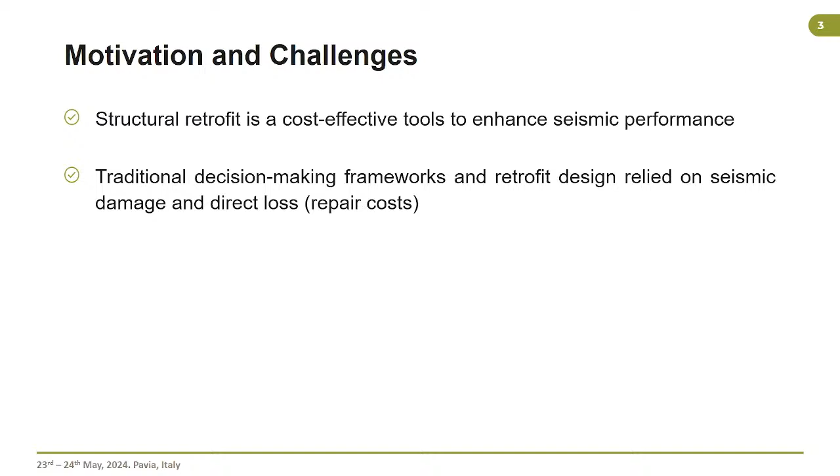I'd like to begin with the reasons that motivated my research. We all acknowledge that structural retrofitting is a very cost-effective tool to enhance seismic performance. The problem is that traditional decision-making frameworks for retrofitting typically rely on seismic damage and the corresponding direct losses, or repair costs. However, other crucial metrics like sustainability and indirect losses due to downtime are typically overlooked, because of the lack of suitable models to characterize them.

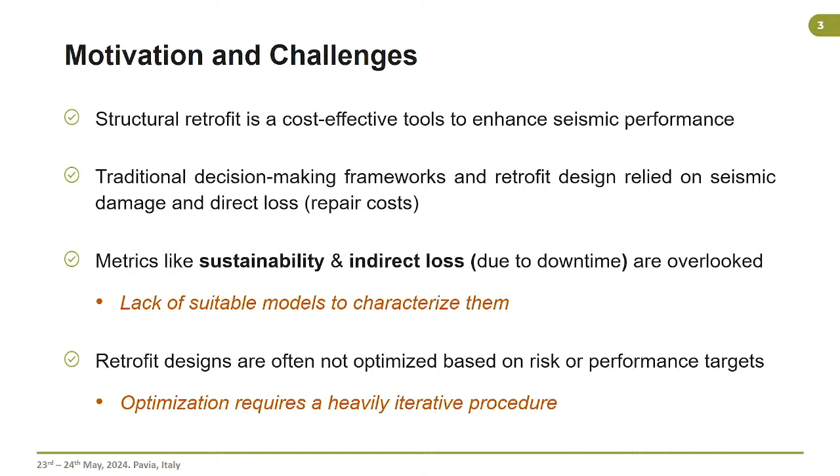Another issue is that retrofitting designs are typically not optimized based on performance or risk targets, again because this process can be heavy in terms of computational effort. So I divided my presentation into 4 parts accordingly, each tackling a particular challenge from what I mentioned before.

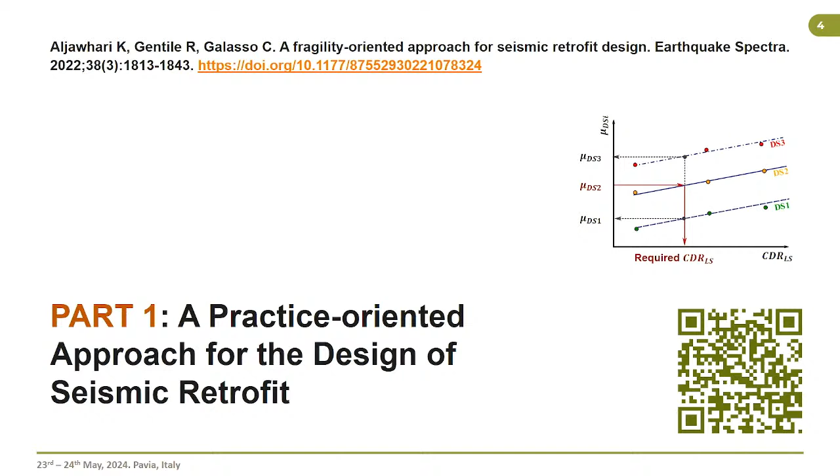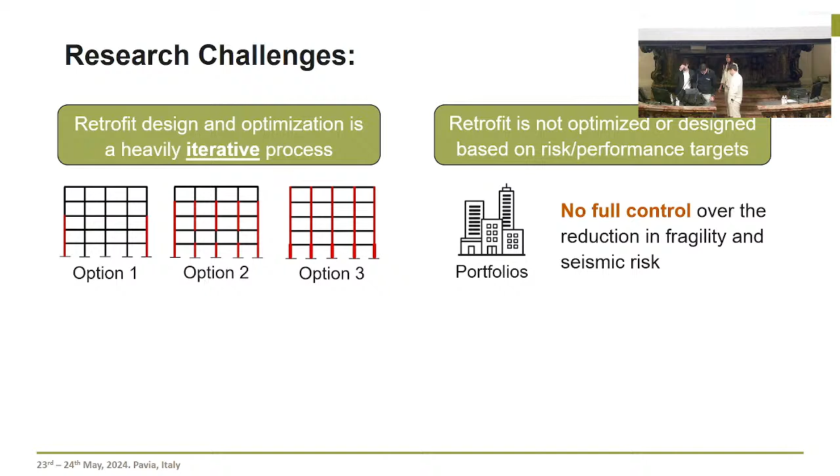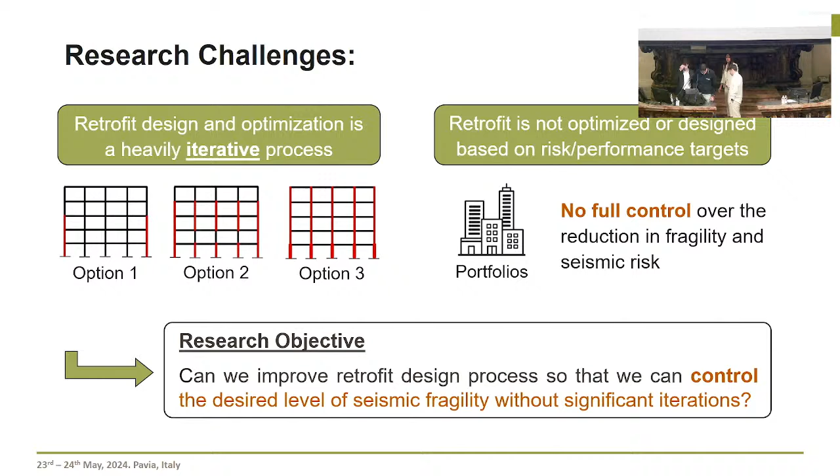Part 1 is about a practice-oriented approach for the design of seismic retrofitting. I remind you that retrofitting design and optimization could be heavy in terms of iterations, and this becomes even more complex when looking at building portfolios, because without optimization I don't have full control over the reduction in fragility and seismic risk. So the question is: can I improve the retrofitting design process to control the desired level of fragility without significant iterations? That's what we'll find out.

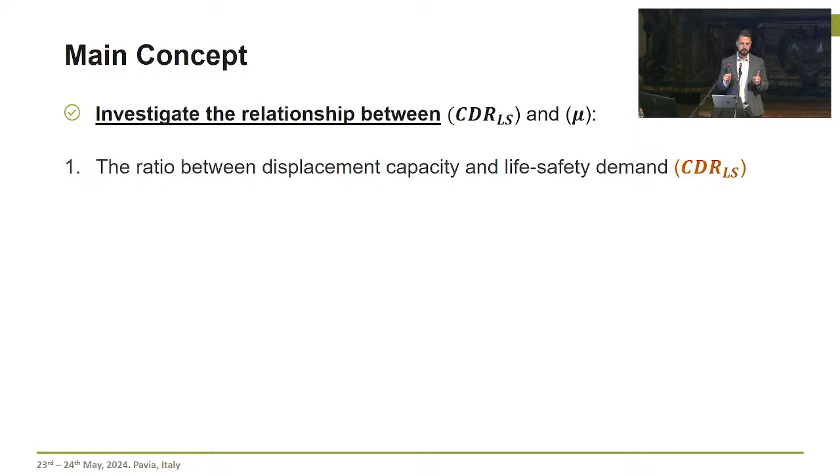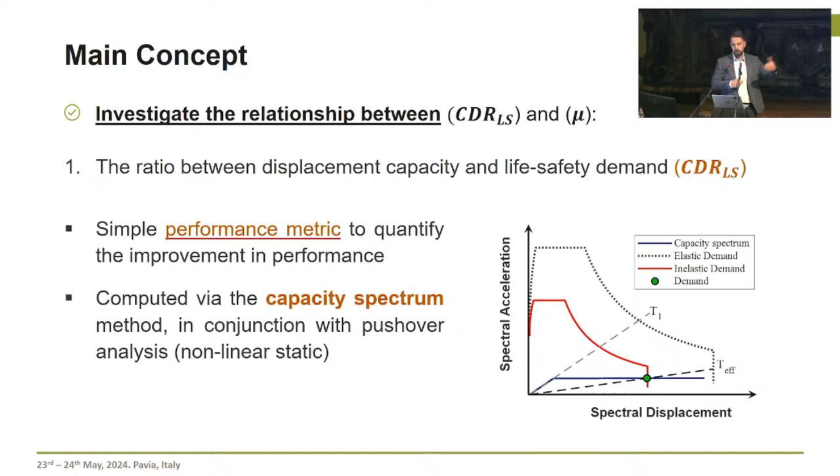This work depends on investigating the relationship between 2 parameters. The first is the ratio between displacement capacity and life safety demand, which for ease we'll call the capacity-demand ratio. This can be evaluated using pushover analysis combined with the capacity spectrum method, and it's a simple performance metric that gives an idea of how the seismic performance is evolving.

The second parameter is the median values of fragility relationships for different damage states. Fragility here is the conditional probability of exceeding different damage states given the ground shaking intensity level. We are looking at 3 damage states: moderate, extensive, and near collapse. In normal cases, I might require nonlinear time history analysis to derive these relationships.

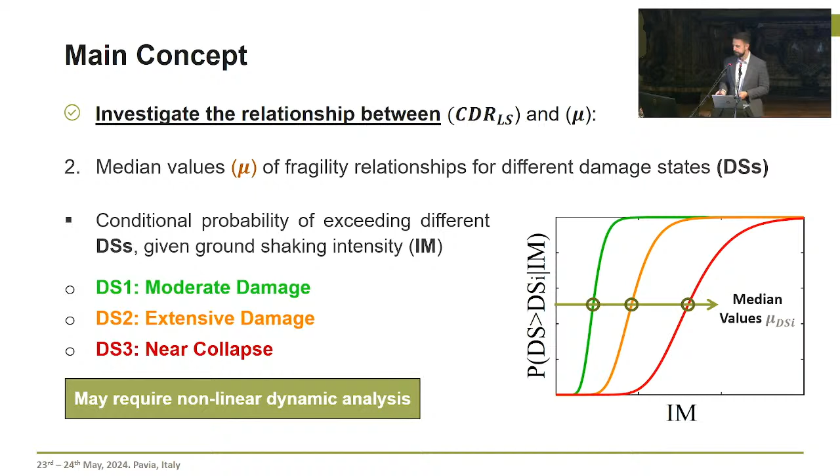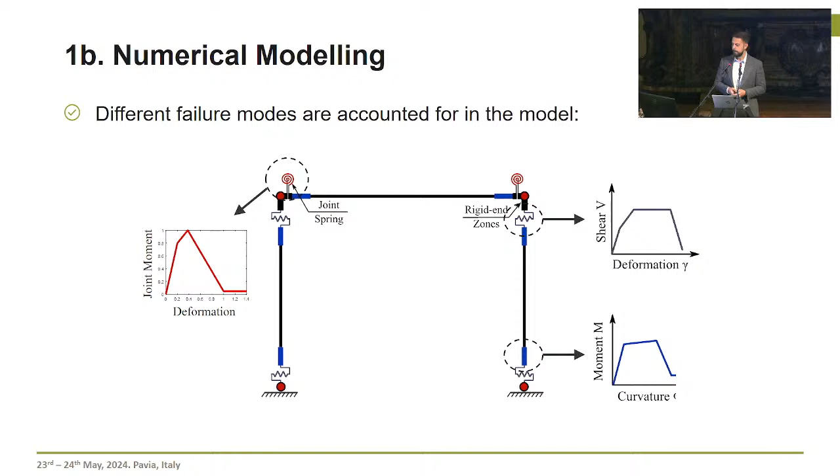I'm looking at a 5-story pre-code frame representing Italian buildings before the 1970s, designed for gravity loads only. This was modeled using OpenSees accounting for different failure modes, and I ran an initial assessment for that building. On the left you see the pushover curves together with damage observations, and on the right an illustration of the capacity spectrum method.

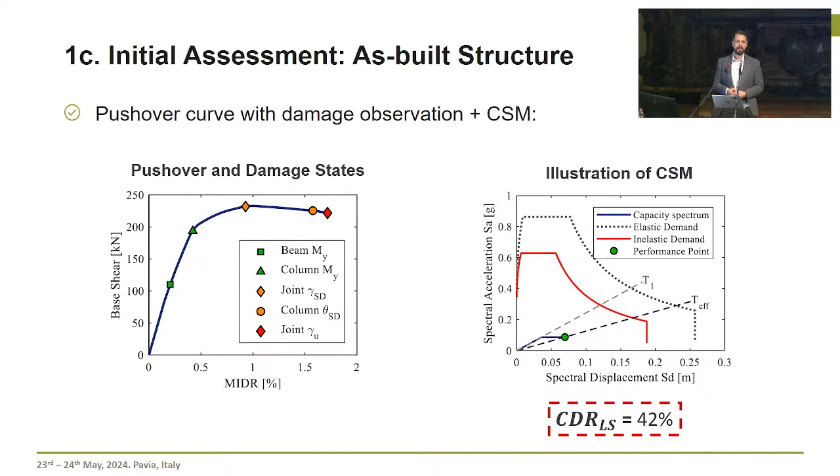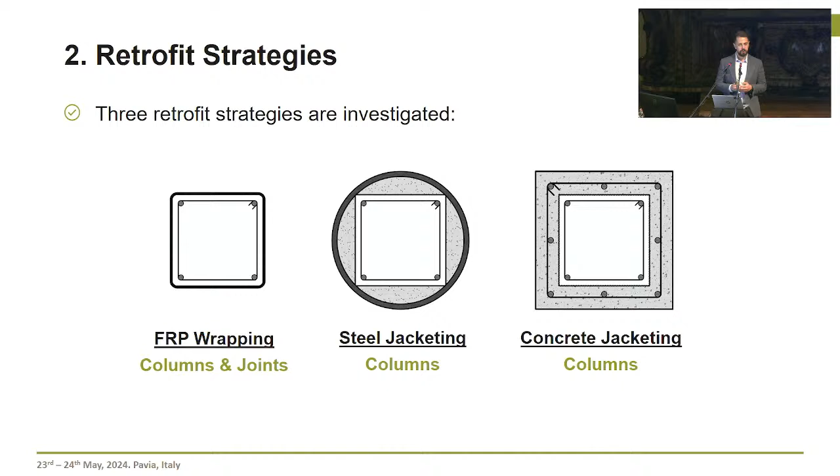The most important part is that the capacity-demand ratio equals 42%, meaning my building has less than half of the required capacity. So I enhanced its performance by considering 3 widespread strategies: wrapping the columns with FRP, steel jacketing or encasements, and finally traditional reinforced concrete jacketing.

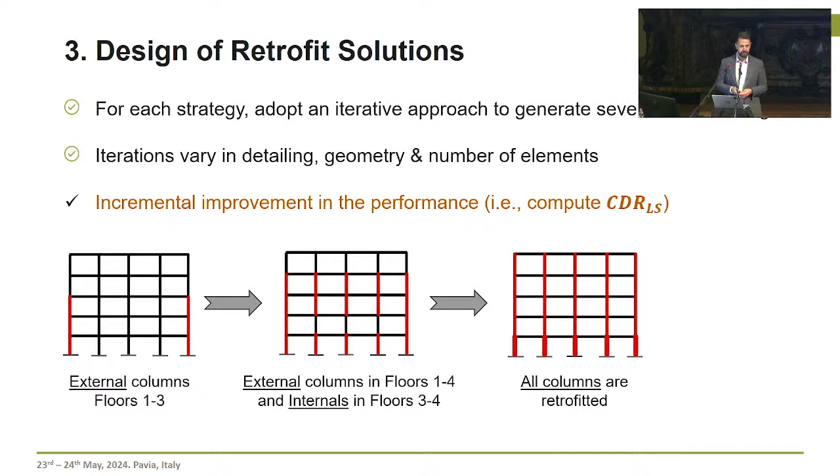For each strategy, I designed multiple retrofitting layouts that could vary in terms of detailing, geometry, and number of retrofitted elements in a way that achieves an incremental improvement in the seismic performance. I ended up having between 13 to 18 cases for each strategy.

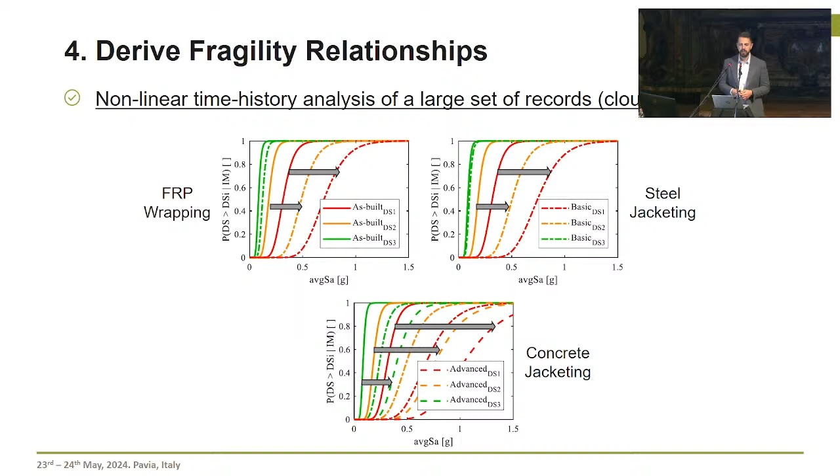Then I derived the fragility relationships for both the as-built and the retrofitted cases. We can see here that the fragility curves are shifting towards the right, meaning that the structures are becoming less fragile.

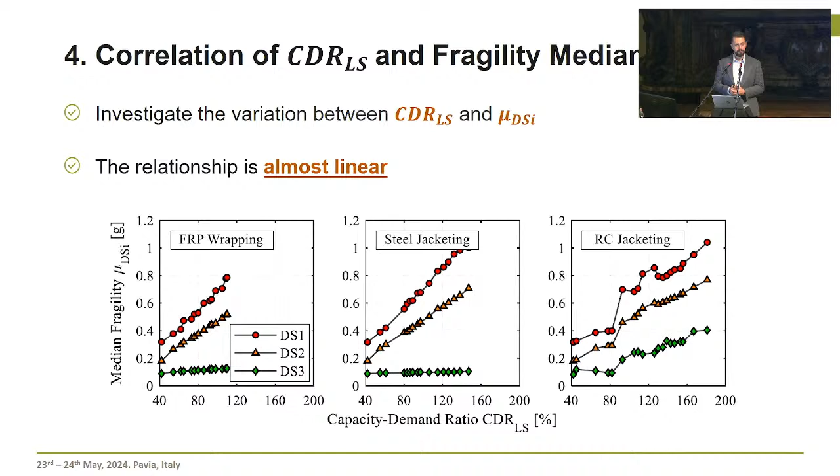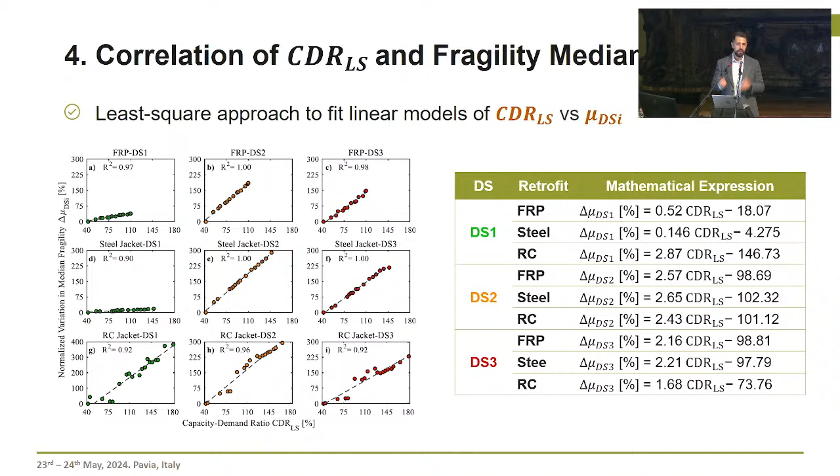So let's now look at the relationship between the capacity-demand ratio and the median fragility. We can see here from a visual perspective that it's almost linear. This is something I also verified in terms of goodness of fit by fitting the lines you can see in the slides, and on the table we can also observe the exact formulas. I also verified that in terms of structural mechanics just to make sure that it works.

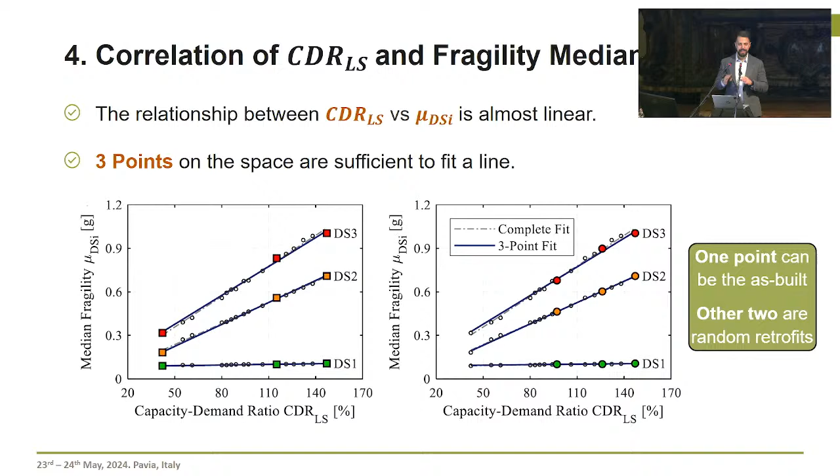So now that we know the relationship could be almost linear, it means I don't really need 15 or 20 points in order to fit the lines. 2 or 3 points are going to be enough. Given that one of the points is going to be the as-built structure, then the other 2 points could be any retrofitting layouts that achieve a better performance compared to the as-built structure.

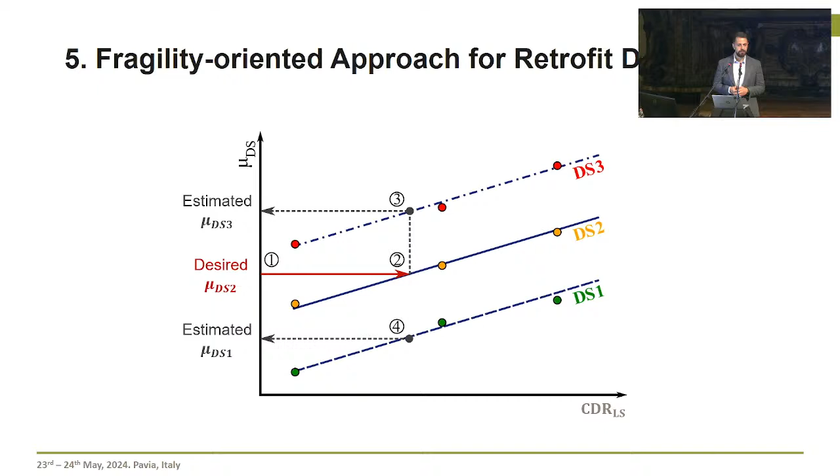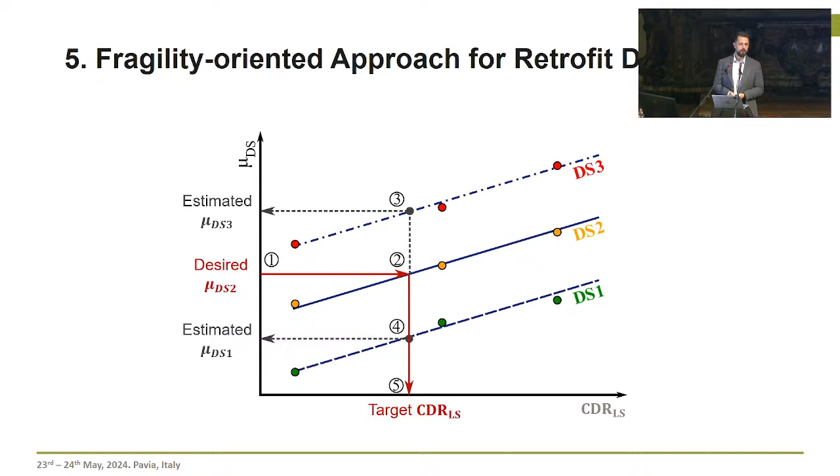So, how do we use this approach? We start by selecting the desired level of median fragility. Let's say it's for damage state 2, and then we get estimated values for damage state 3 and 1, and finally we acquire the target capacity demand we have to achieve during the retrofitting design process to guarantee the desired reduction in terms of fragility.

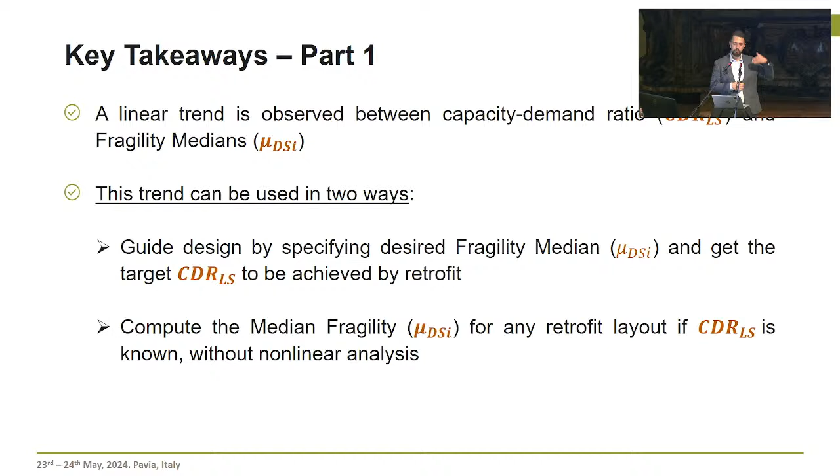So, key takeaways part 1. We have a linear relationship between capacity demand ratio and median fragility. This can be used in 2 ways. Way number 1, we start with the median fragility and get the target capacity demand ratio, or the other way: I might have a random retrofitting layout, I know the capacity demand ratio, and I just want to estimate the median fragility without conducting extra analysis.

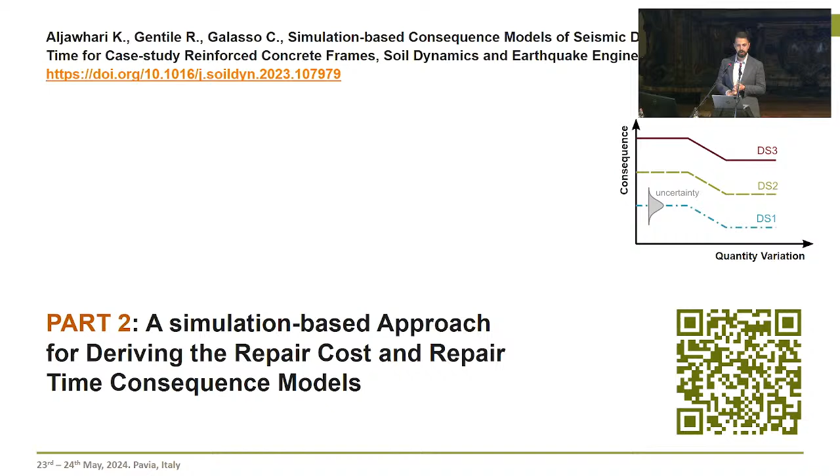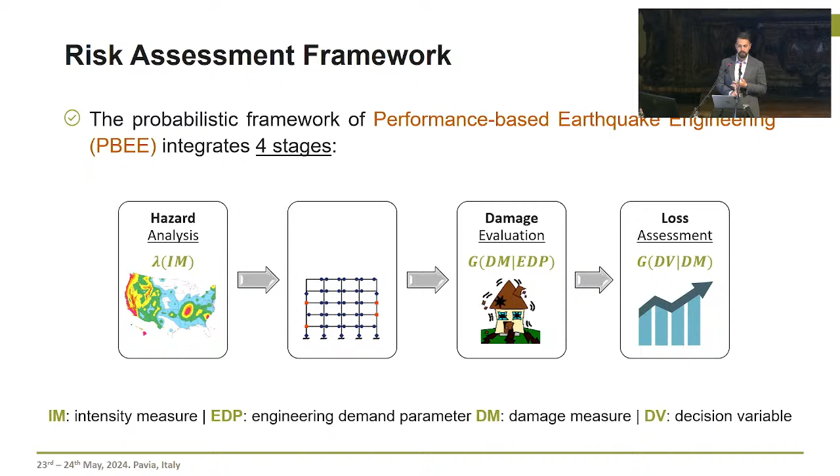Let's now move from fragility into seismic consequences. Here I'm presenting a simulation-based approach for deriving consequence models of repair time and repair cost. We are all familiar with this framework, which evaluates risk by integrating 4 different parameters: the seismic hazard, the response analysis, the damage evaluation, and the loss assessment.

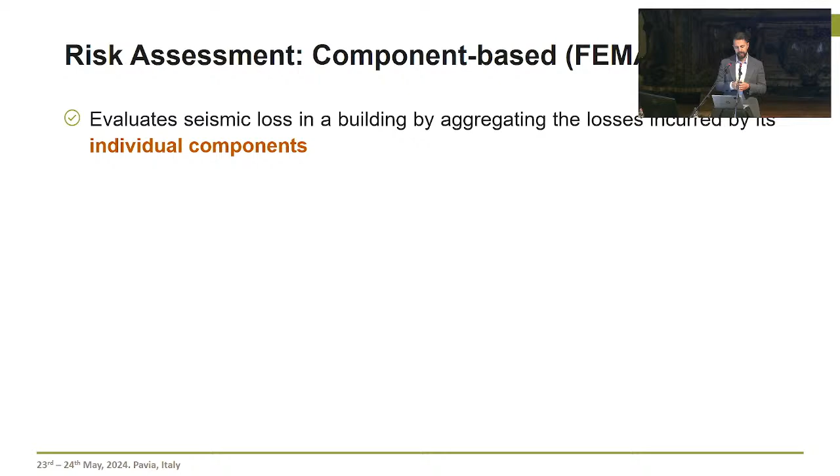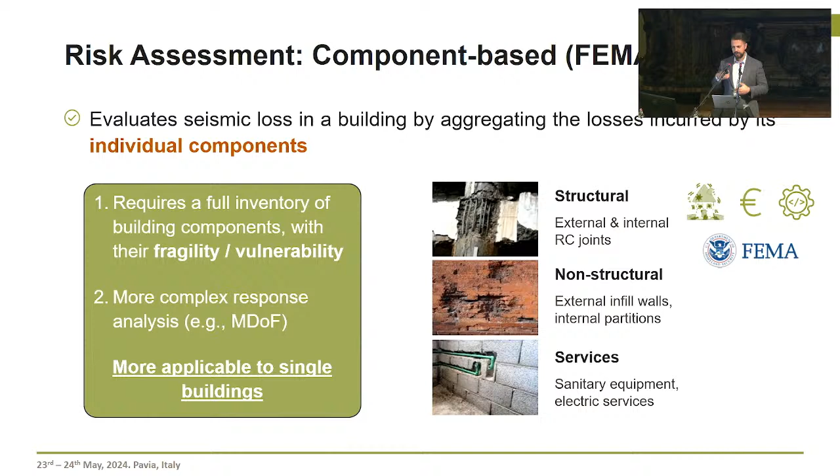There are 2 main ways to apply this approach. The first is the component-based FEMA P58 analysis, in which losses in a building are evaluated by aggregating the losses in individual building components. In that case, I'm going to have to define a full inventory with all the components and their fragility and vulnerability data, which is not very straightforward. That's why I prefer to use this approach for individual buildings.

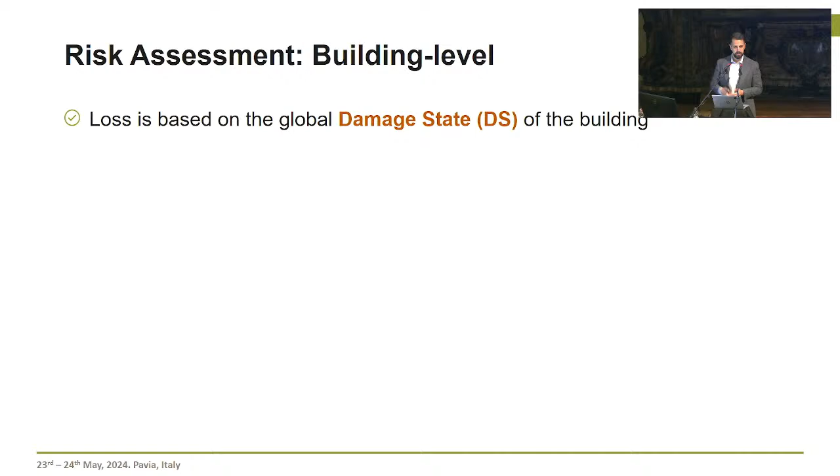On the other hand, losses can be quantified at the building level based on the global damage state sustained by a building. To do that, I'm going to have to combine fragility relationships with the so-called global consequence models. These are also well known as damage to loss ratios, which are basically the loss corresponding to a particular damage state divided by the replacement cost.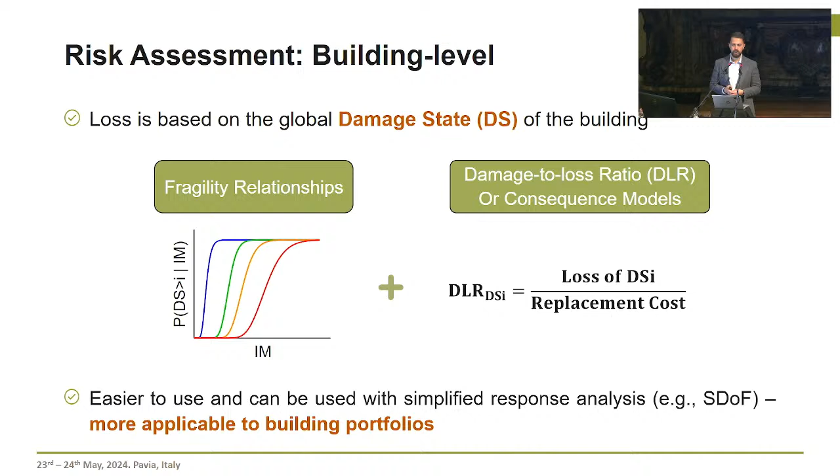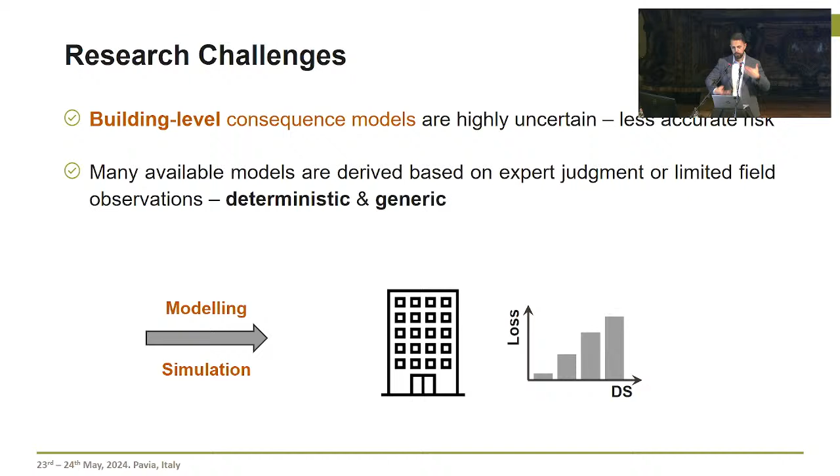This method is easier to use, it has less input. That's why I prefer to use it when I consider building portfolios. Since I'm interested in portfolios, I'm always pretty skeptical about the selection of these consequence models because they can bring a great deal of uncertainty. Many of the available models in the literature could be generic, deterministic, or maybe based on a limited set of data. So the question here: can I use modeling and simulation in order to come up with more refined models for these damage to loss ratios?

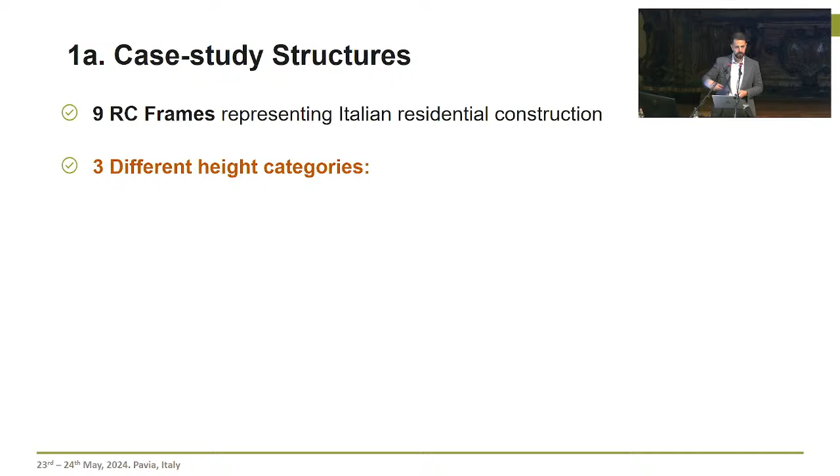That's what we'll see. I decided at this stage to expand the range of case study buildings so that I make the work more useful for the future. We have 9 reinforced concrete frames with 3 different height categories: 3, 5, and 8 stories. They also have 3 different design code levels, which are the pre-code frames, low code, and high code frames.

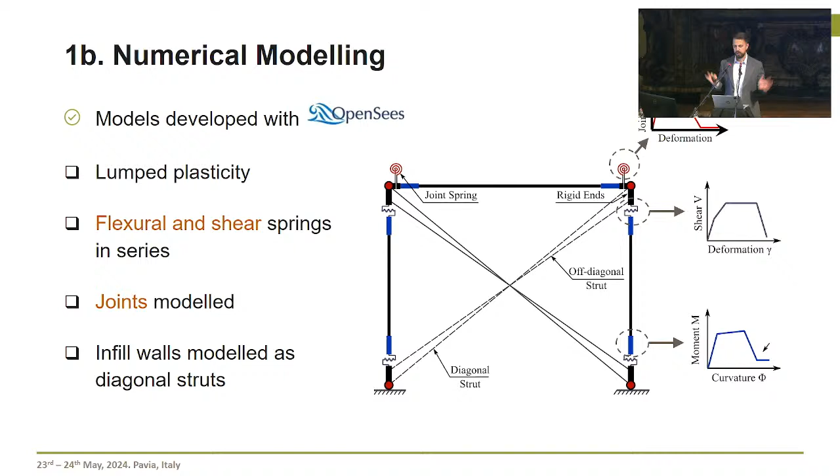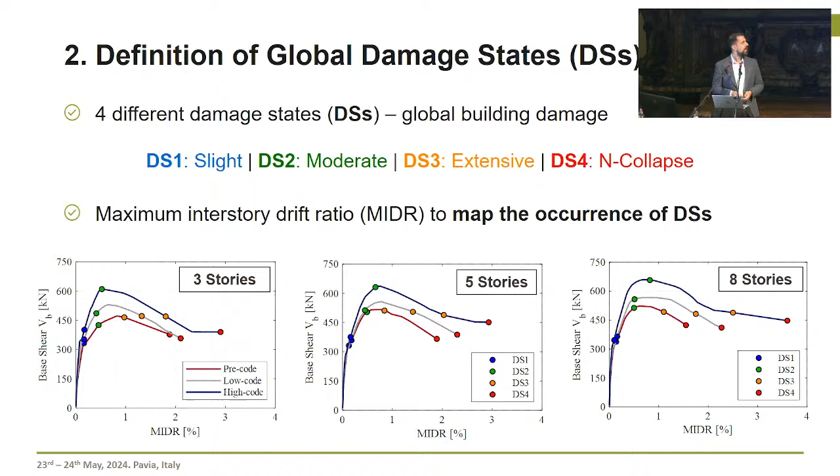I followed exactly the same modeling strategy using OpenSees, and then I identified 4 different global damage states: slight, moderate, extensive, and near collapse. After that, I ran pushover analysis in order to capture or map the damage states in terms of maximum interstory drift ratio, as you can see in the following figures.

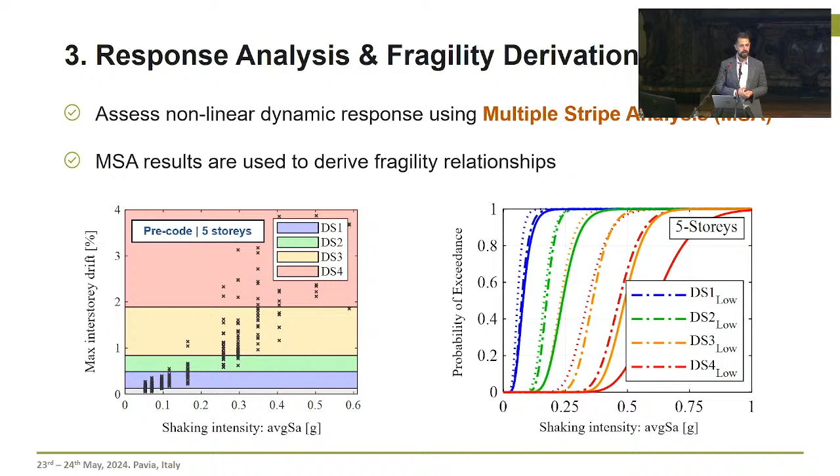Step number 3 would be analyzing the nonlinear response using the multiple stripe approach. This is a sample of the results, and eventually using the output in order to derive the fragility relationships.

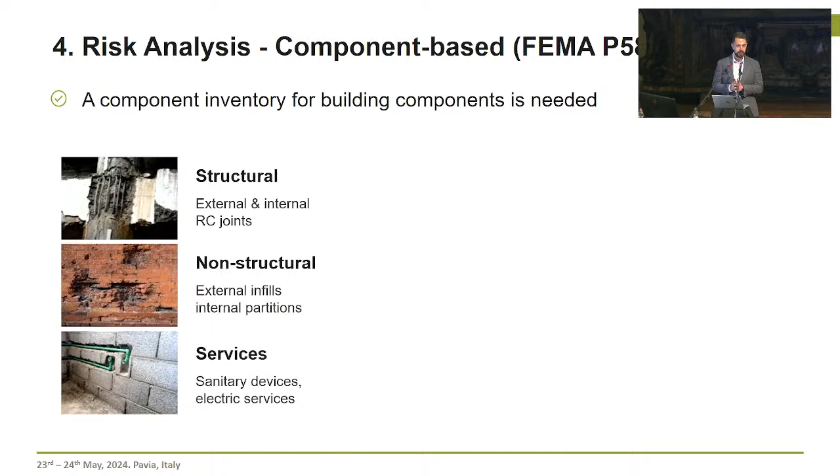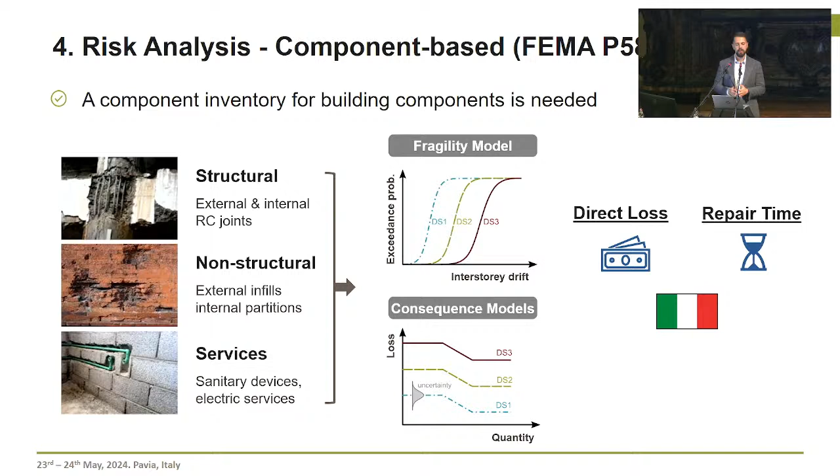Step number 4 would be conducting the risk analysis using the component-based FEMA P58 approach. Here I defined a component inventory that is suitable for Italian components. I identified fragility and consequence models for these components, but I made sure that all these are selected from Italian references because I wanted the results to be representative and meaningful.

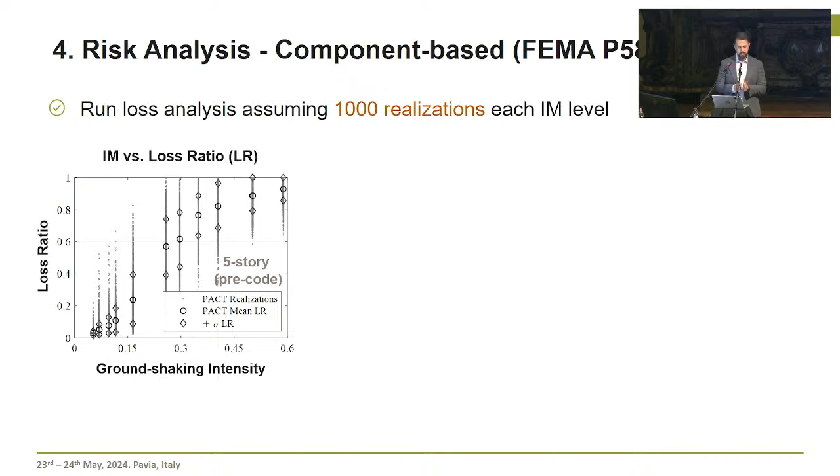In this figure, we can see the realizations of loss given the ground shaking intensity. What we're going to do now is a conditioning process in which each of these realizations is connected with the global damage state. To do that, we simply compare the maximum interstory drift simulated, which is the demand, and

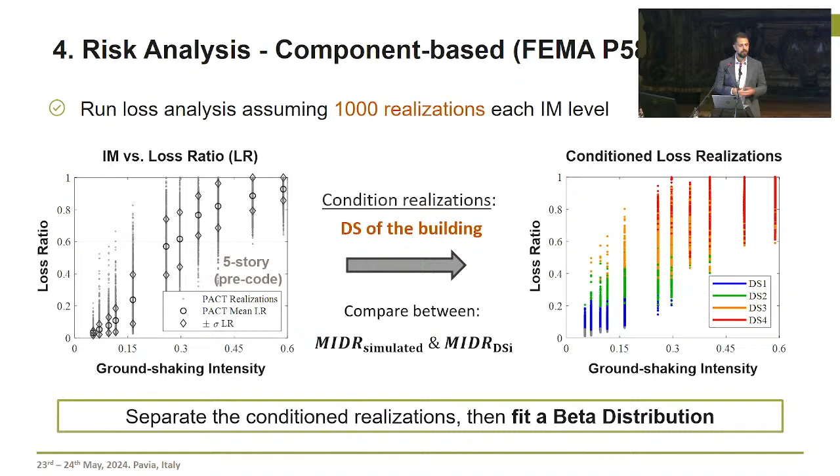the interstory drift for the damage state occurrence. Accordingly, we can separate these realizations into beta distributions to represent the consequence models.

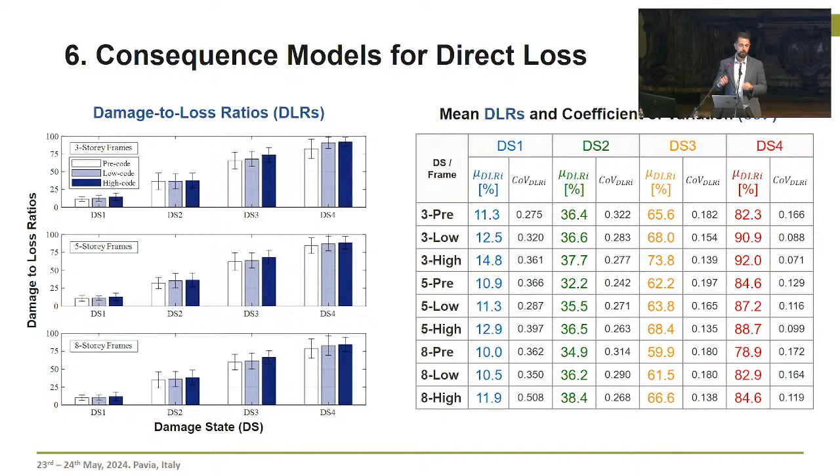So the first output is the damage to loss ratios for 9 different frames and 4 different damage states. They are represented visually and also in terms of tables. We do have mean values and coefficient of variation. The same was done for the damage to repair time ratios.

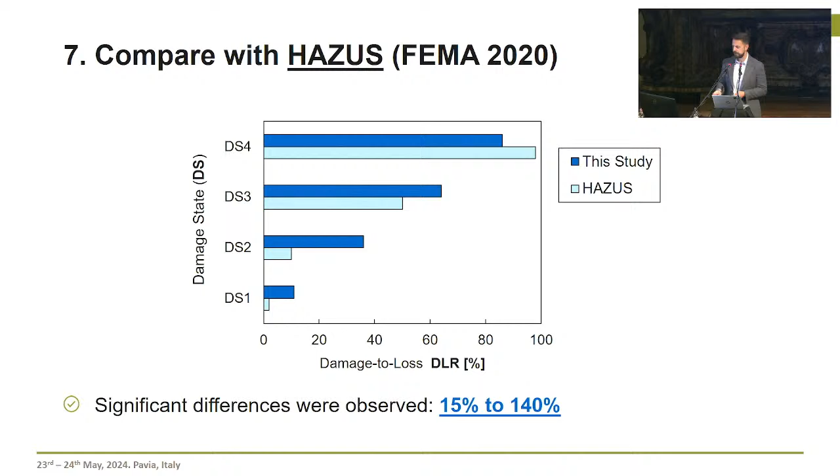In this figure, we see an interesting comparison between the damage to loss ratios that I acquired and the ones found in HAZUS, which is one of the widespread references for global risk assessment. I found significant differences that could be 15%, but maybe up to 140%. That's why the selection process for these models is quite crucial for accuracy.

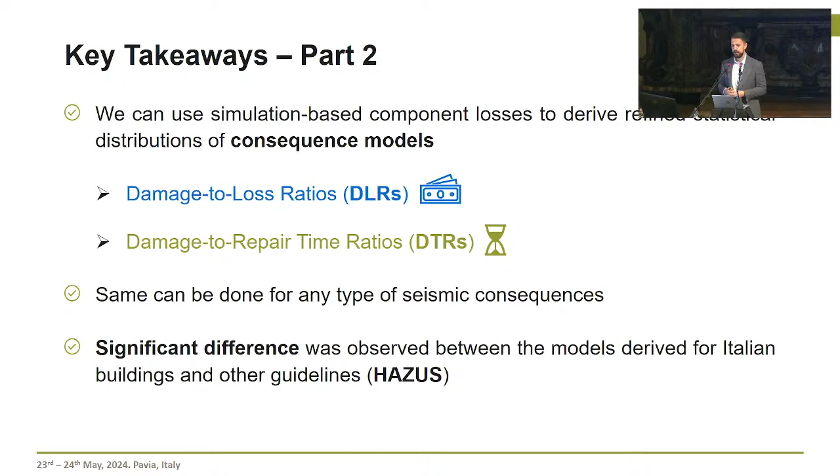So, key takeaways part 2. We now have a simulation-based approach to develop consequence models. I did it for loss and for repair time, but it's actually valid for any type of consequence. And finally, I found significant differences in my work.

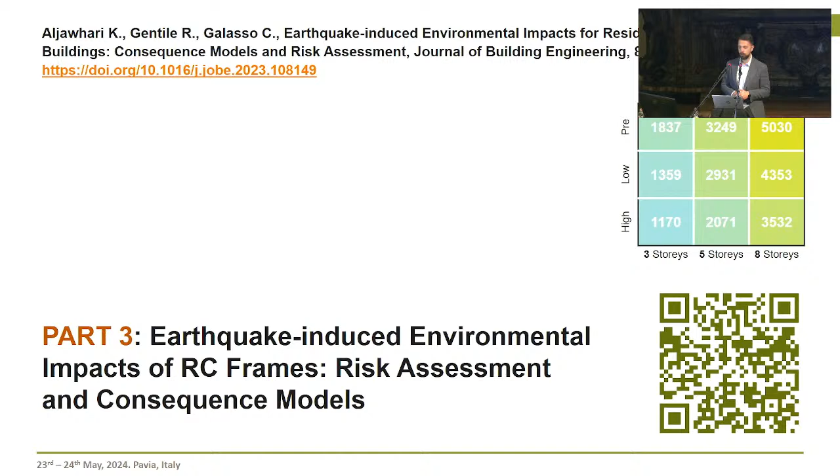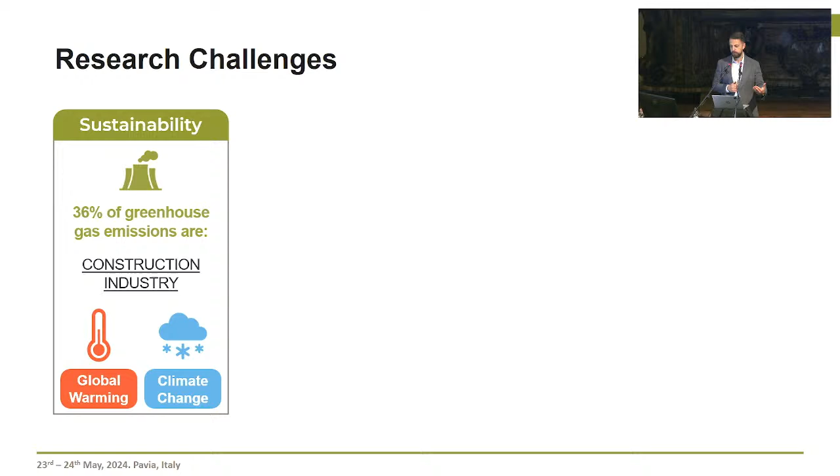Moving now to a different type of consequences, which is the earthquake-induced environmental impacts or sustainability. Now, the question is, why is sustainability important? That's because 36% of greenhouse gas emissions are produced by the construction industry, and they lead to impacts like global warming and climate change.

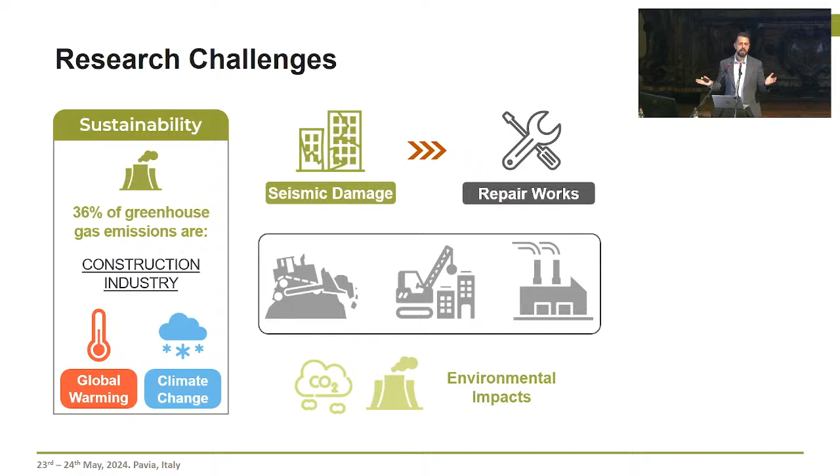This situation becomes even more critical in earthquake-prone regions, because buildings are going to experience damage, and this means more material production, more landfilling, and more carbon emissions. The problem is that we don't have sufficient models for Italian buildings that quantify these carbon emissions either at the component level or the building level.

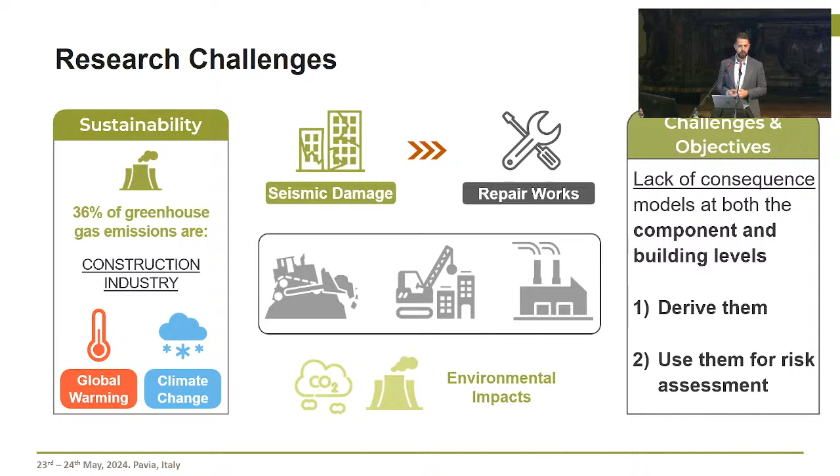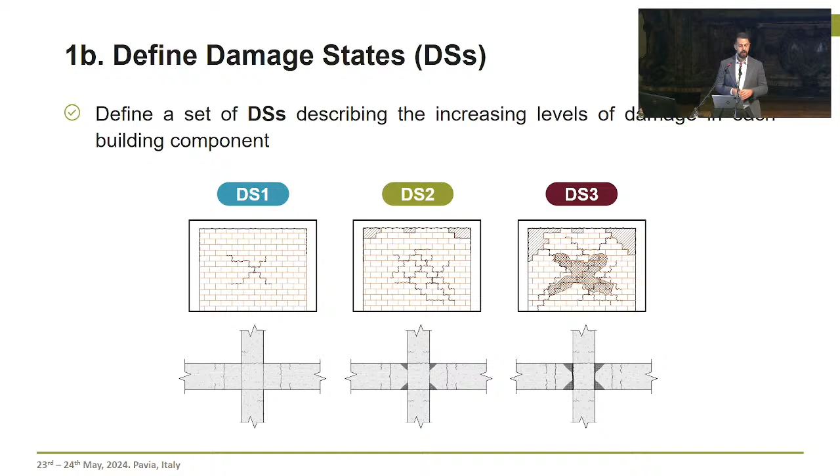So the target here is to derive these models and use them for risk assessment. I have the same component inventory here, I didn't change it, but I defined different damage states that describe the increasing levels of damage conditions for the building components rather than the building as a whole.

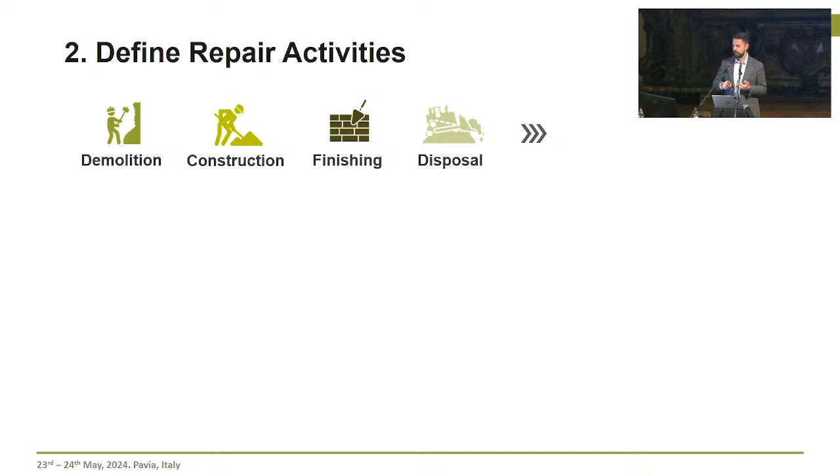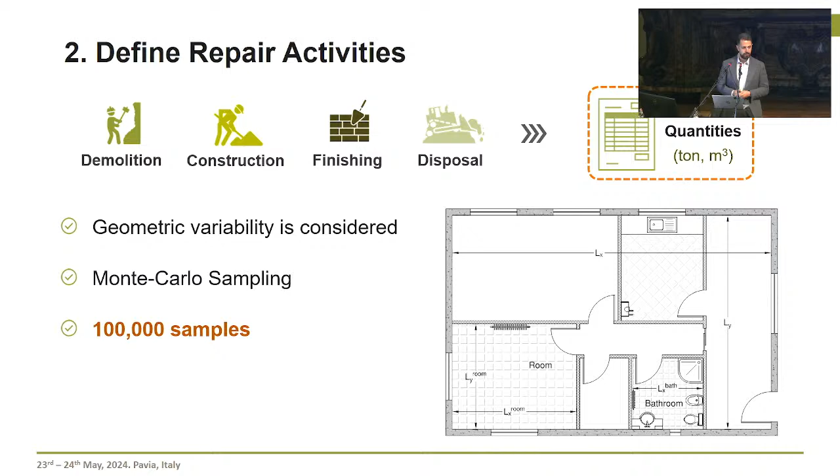After that, I defined suitable construction or repair activities that could include demolition, construction, finishing, and disposal. But the most important part is to identify the material quantities corresponding to these actions. And of course, I considered geometric variability using Monte Carlo sampling.

Step number 3 would be evaluating the carbon emissions from the repair activities. I did that by developing a database that contains carbon factors, which identify the carbon footprint per material unit quantity.

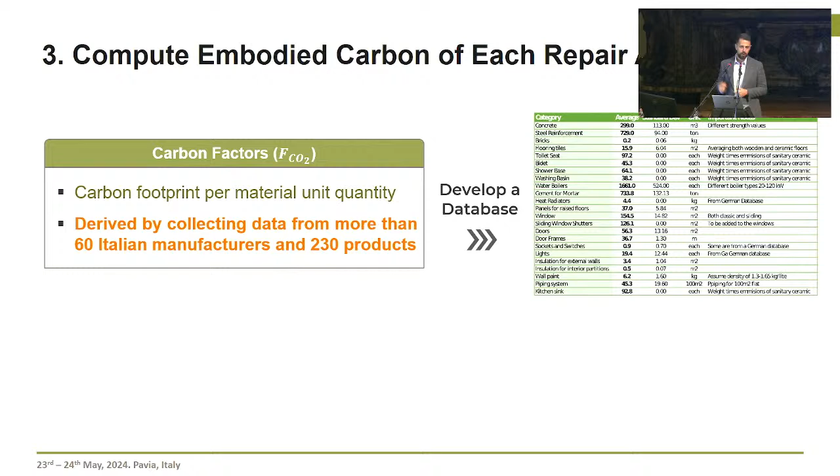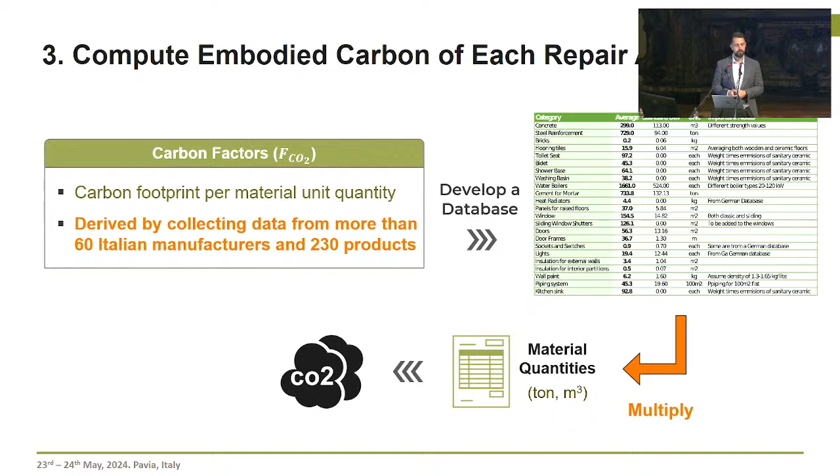To do that, I referred to an Italian platform that has environmental impact data from more than 60 Italian manufacturers and more than 230 product classes. So once I have this database, I just multiply it with the material quantities, and finally I get the embodied carbon of repair activities.

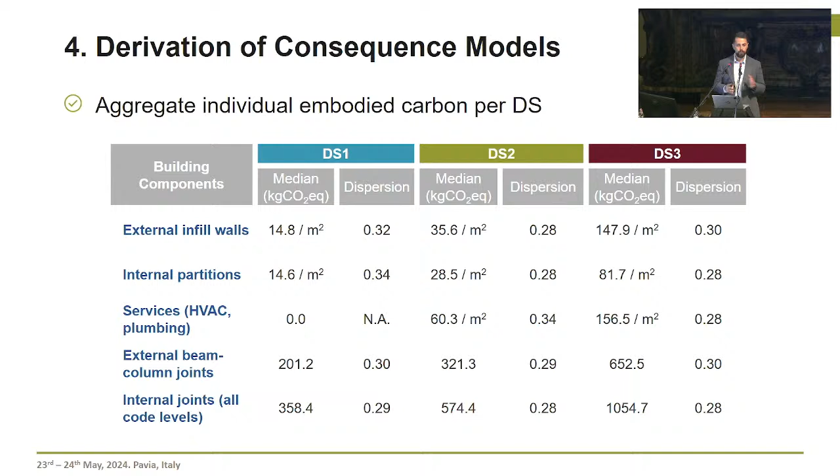So naturally, step number 4 would be aggregating the carbon resulting from different repair activities per each damage state, and I ended up having these consequence models for building components expressed in terms of median and dispersion for different damage states.

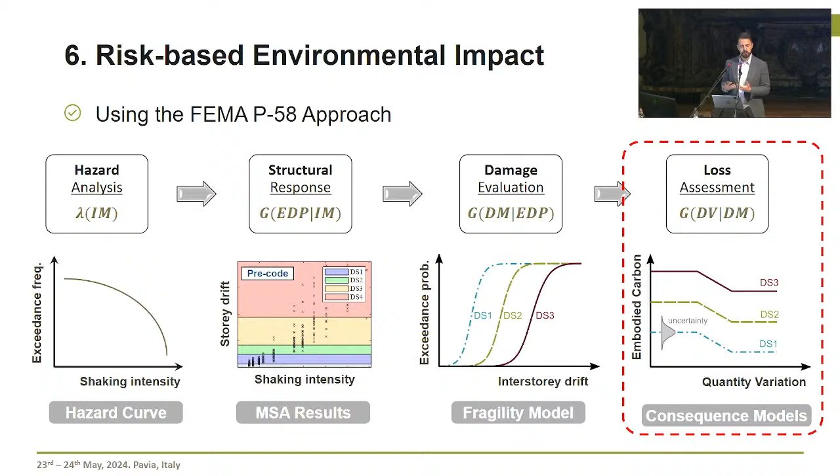Now we have all the inputs needed to conduct risk assessment, and I have the same 9 RC frames I talked about before, using the same FEMA P-58 risk assessment approach. The process is exactly the same. The only difference is that instead of consequence models for euros, for money, I'm using consequence models for carbon emissions. The first output in the process is the environmental loss curve, which expresses the mean annual frequency of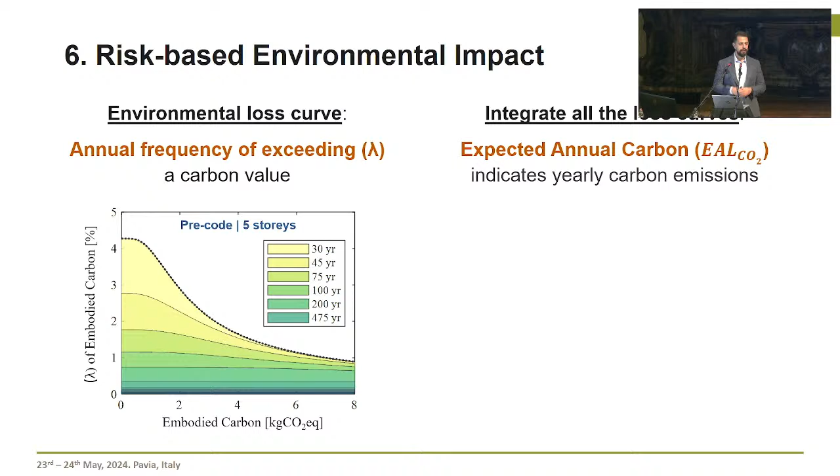exceeding different values of embodied carbon. Once we integrate this curve, we get a single parameter called the expected annual embodied carbon, which gives us an indicator of the carbon emissions from seismic damage on a yearly basis.

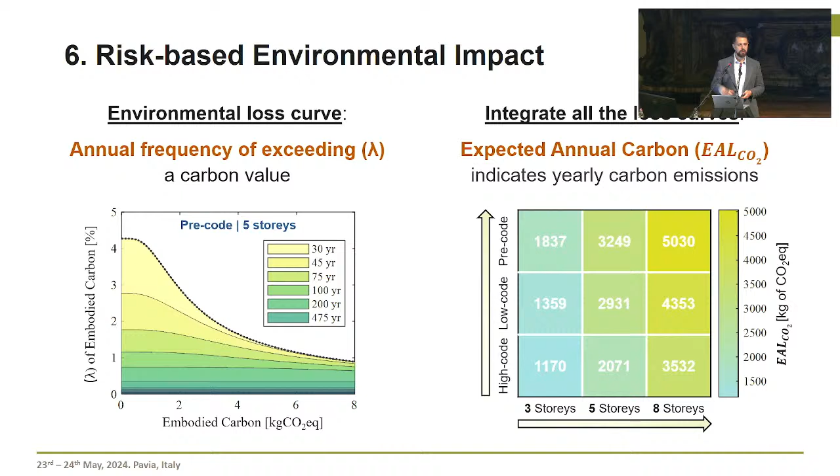Doing this integration for all 9 case study frames, we get this colorful matrix expressed in terms of number of stories and design code level. Of course, whenever we have higher stories or lower design code level, the expected annual carbon is going to increase.

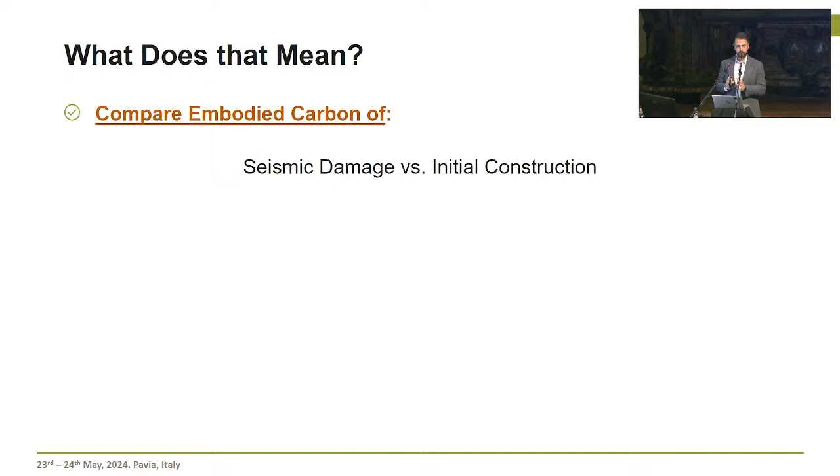But in order to deepen our understanding of these values, I'd like to make some meaningful comparisons. The first: let's see how the embodied carbon of seismic damage comes as a fraction of the embodied carbon for initial construction. This fraction equals 15% in the high code frames, increases to 22% in the low code frames, and becomes as high as almost 30% in the case of pre-code frames.

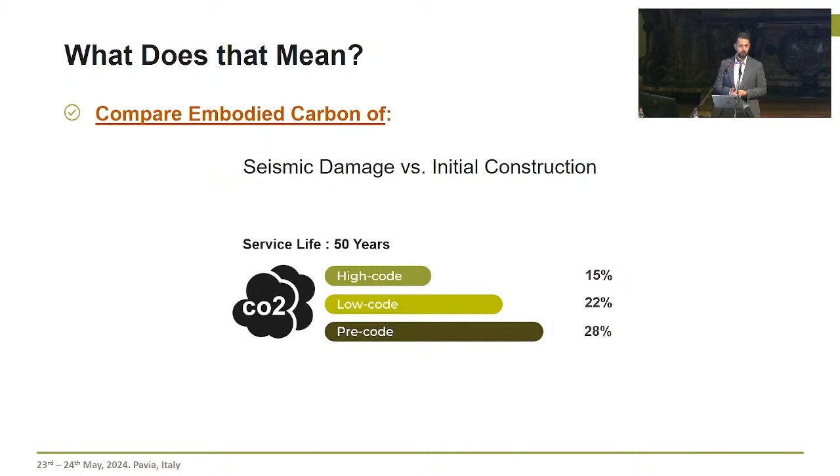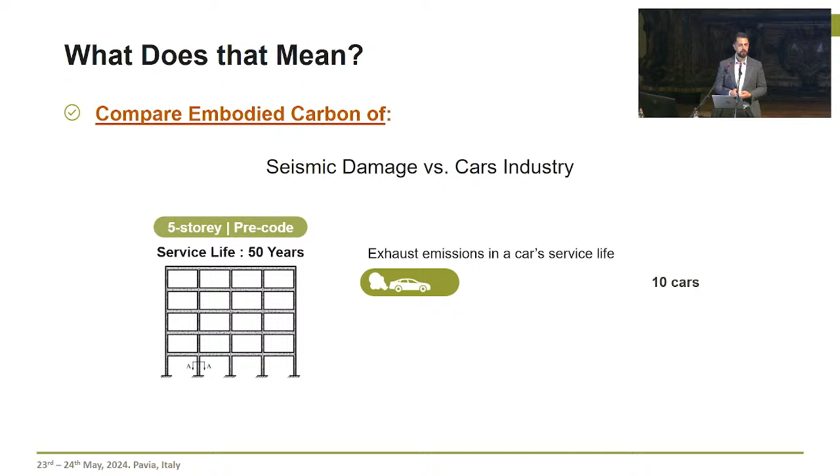I've done another interesting comparison taking the five-story frame into account. We found that the carbon emissions of seismic damage are equal to the exhaust emissions of 10 cars during their entire service life, and equal to the embodied carbon of producing 81 cars, which is a significant number.

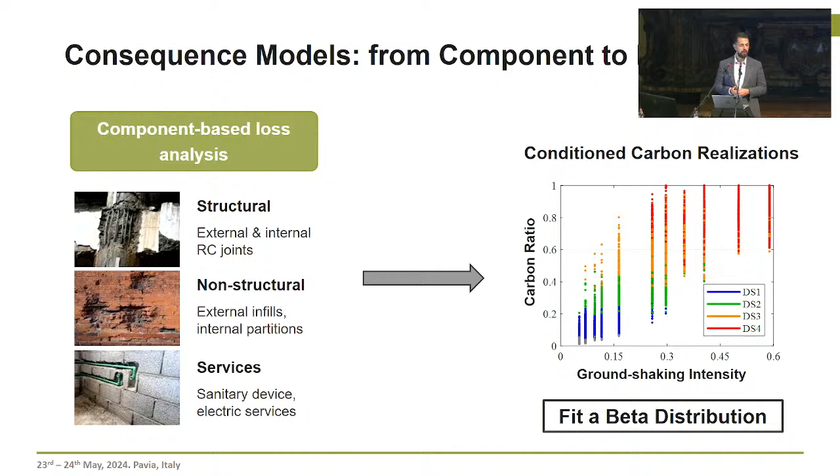After that, I applied the same simulation-based approach to get the consequence models at the building level, and I ended up having damage to embodied carbon ratios, exactly like I had before with damage to loss ratios.

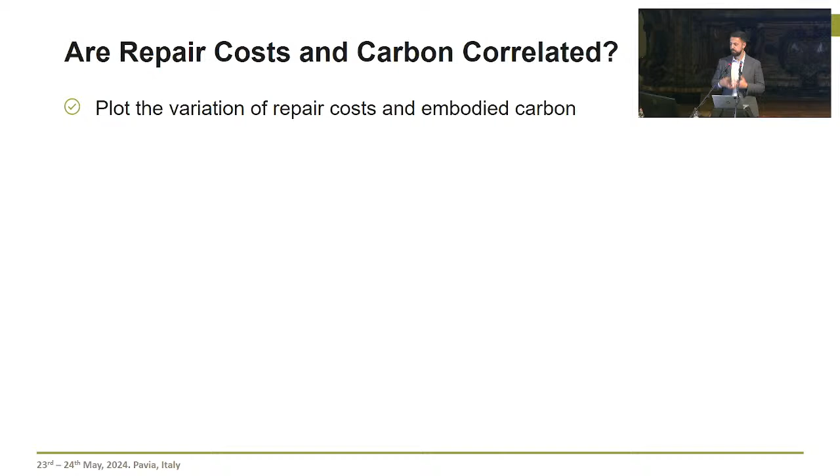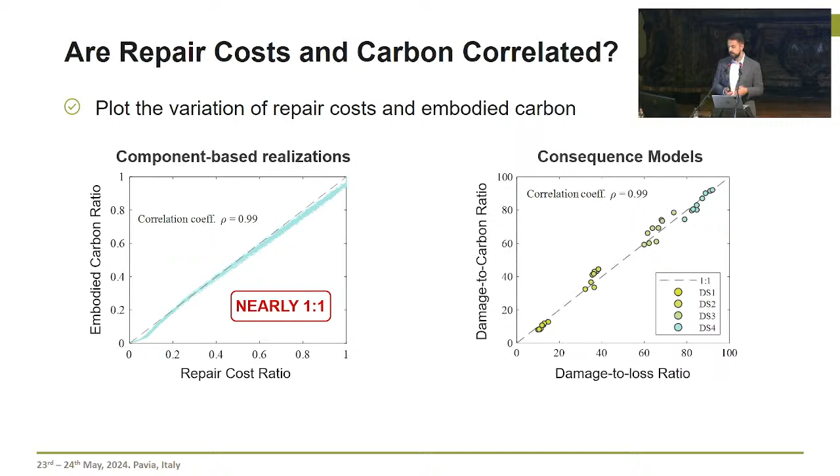During this part of the work, there was a question in my mind: are repair costs and embodied carbon correlated? To answer this, I plotted the repair cost realizations on the x-axis versus the embodied carbon realizations on the y-axis. The same relationship can be observed when I plot loss ratio versus it, but it becomes a bit trickier because we saw before